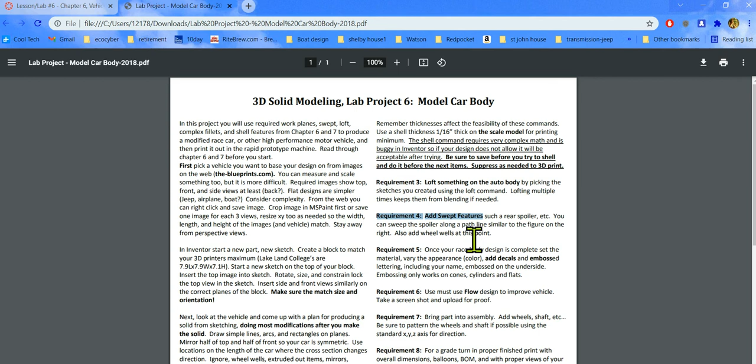You got to loft something. Well, most of you are lofting the body of the car, so you're covered there. But we do have to do a swept feature. So you can do a rear spoiler or an exhaust muffler type thing, or you can do a mirror. I'll probably do a mirror in the video today. Once that's all done, you can add decals and colors, which I did in the last video. You can drag them in your browser down below the mirror if it doesn't look good. So I'll show you that in the video too.

I do have an Inventor feature that used to offer flow design, which was a really cool item. It lets you do aerodynamics on items you just did, and showed you the drag coefficients on them. They quit supporting it though, so it doesn't really work very well anymore. If I can get it to work, I'll show you, but I know they quit supporting it a year or two ago, and I don't think I was able to get it to go last year. So you can ignore number 6. If you're really interested, you could probably download the old version of Inventor Educational and download the flow if you can find it. I do have a higher end version that's out there, but I haven't messed with that yet.

Then the last thing, main thing we're going to be doing today, besides doing the sweep, is we're going to add wheels. And you can add a shaft - the main thing is adding the wheels. You don't have to add the shaft unless you want to make it roll or something like that. So basically, then 3D print everything, or add a drawing and then 3D print it. That's all the items that are required. The wheels and stuff do need to be added in an assembly, of course. So, all right, let's go ahead and get started.

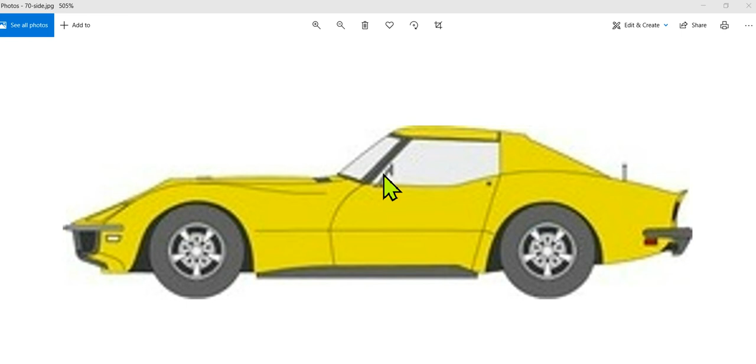So this mirror, it's definitely got a couple shapes in here, so it would be hard to do that with a pure sweep. Now, if you're doing a wing, maybe I'll put a wing on this thing to show you that sweep would work better with that. This mirror is more of a separate loft. I'll just do both real quick here - I don't know how well they'll work, but we'll give it a shot.

Okay, so let's look at the mirror. When you do the mirror, you need a plane to start with, okay?

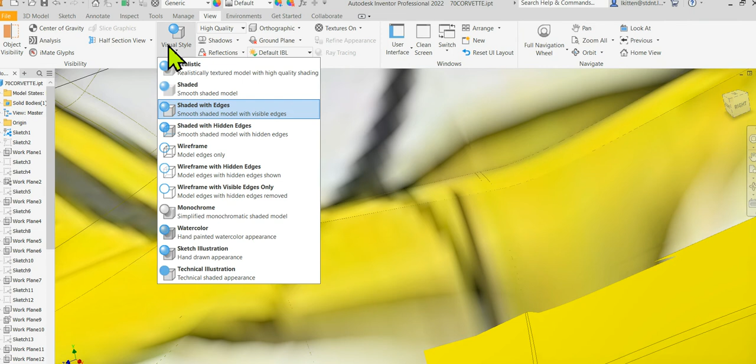I'm going to go into a hidden view real quick here, view, hidden, or visual style, wireframe, so I can see everything. I noticed before that this plane was round where the mirror is. You can go back and forth there if you want to, shade it with edges. I could probably do that too.

Okay, so I'm gonna make a plane right around here, and then on that plane I will put the mirror. You can see the mirror's getting messed up bad with this decal.

So back to the 3D model, I need a plane there to put my first sketch on. Now I need another plane to put another sketch on. I'll show you how to create a couple of them real quick.

One of the definitions of a plane, of course, is 3 points in space. So I'll pick 3 points on this one. I don't know what else would work, it'd be pretty tough to do some of these other ones. So I'm gonna pick 3 points.

And there's a nice flat on here. You could also go flat all the way across the car on edges, but I've got a flat there. So I'm gonna pick like, and it can start out inside the car.

It's not a big deal, it just needs to be. In fact, it might work better if it's inside the car. Then you want to have an airspace in there.

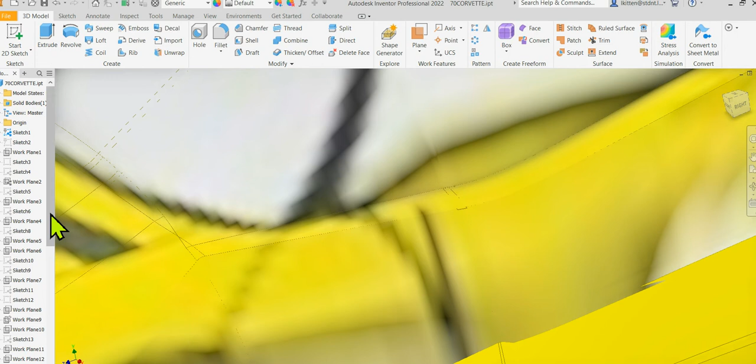So I'm going to go actually from these 3 points right here. Okay, so there's a small little plane I just created there. You can't see it unless you go down here because it's basically inside there just a little bit. It's shown real small, but remember it goes on indefinitely into space.

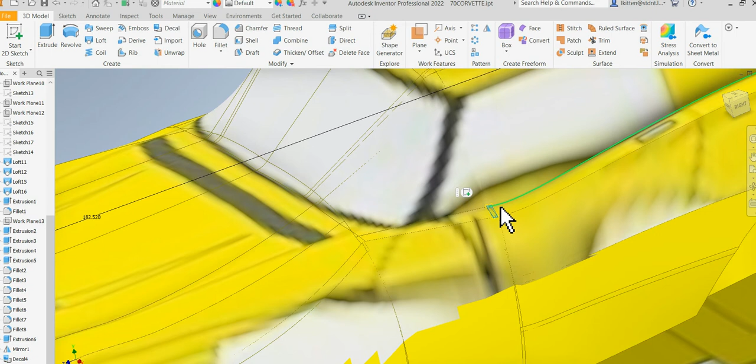So I'm going to put the sketch at the bottom of my mirror on that. Now I need a sketch basically perpendicular to that to create my cross section on.

Okay, so to make one of them, let's see if we can figure it out. So parallel, midpoint, through normal to curve, normal through axis, through point, tangent, tangent, tangent, go 3 points.

All right, so now I need to create a plane for my path. So I'm going to do angle to plane. I'll just do 90 degrees to plane around edge. So I'm going to pick that one.

And first thing it says, select line or plane. Well, there's no line or plane in here. So maybe I can make an axis first.

Axis. There's that plane, so I'm making that axis through those 2 points. I'm dropping down the axis, and I'm going to put it through 2 points.

And there's no points on there, so then I got to create a point. So this is how you kind of build it up. So there's that plane, I'll make that thing, it already is visible.

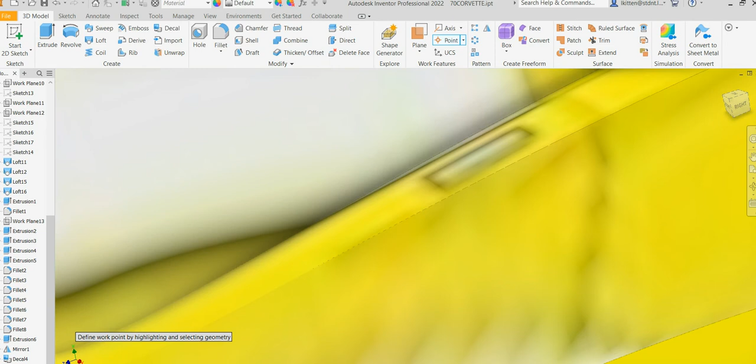Go back to hidden so I can actually see it decent. View, visual style, it's a little tricky here. Wireframe. There's that plane I created right here.

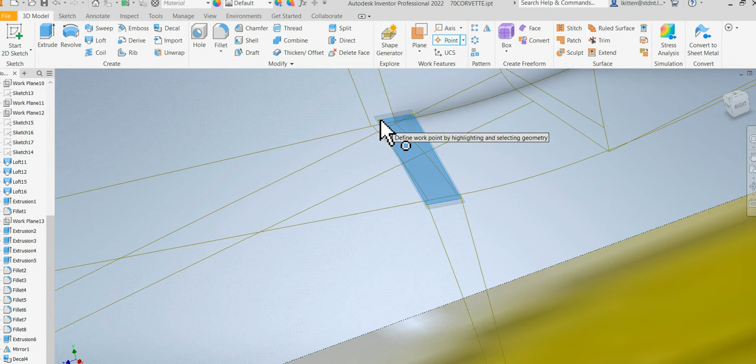Okay, so I'm going to put some points on there. 3D sketch. Points, and right on the corners of it, I'm going to try to create a point. It lets me.

Not one there. Okay, there. I wasn't actually on the point, I was on that plane. So I'm going to the point of where those.

I'm creating points on the intersections of all those edges. Okay, now this is a plane, so I couldn't of course put a point on there.

Now I've got points basically on. I keep hitting it, I wish it would stick, but it doesn't. There we go, I got 4 points on there.

Now I can create an axis through there hopefully. So axis through 2 points. Okay, now I've got an axis on there and a plane, so I can hopefully use those to generate another perpendicular plane. You'd think they'd have one that'd be perpendicular a lot easier, but I don't see it.

Mid plane between, parallel, offset, these are all offsets. Angle around edge. Okay, select a line. We've got that line. Select plane.

Not selecting any of that stuff. This isn't working out very well.

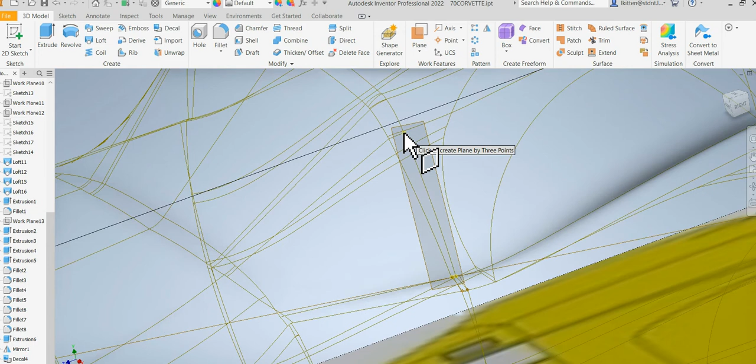Alright, I'm not having much luck making that plane, so I'm going to do an offset from plane after I create another one. Back to 3 points, because that always works. I'm just going to pick a point right here, and then I'll pick one up here.

Okay, I'll do offset that one slightly. Now I'll do a plane offset from that one, maybe about 3 inches. It's going towards me, it looks like. Okay, it looks like that's going to cross there. I'm going to spin it and make sure. Definitely is not crossing that. So maybe more like 1. Now it looks like it crosses through that other plane, which is important for me to draw on.

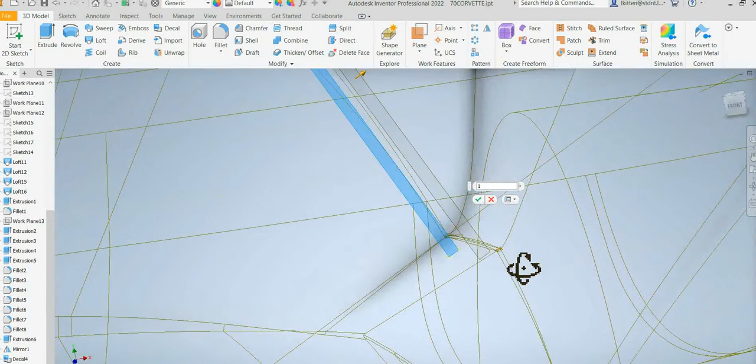So now I've got a path and a plane to start with. To do a loft, this is just going to be the stem - I'm sorry, the stem of the mirror. I'm going to draw the stem on here, new sketch. It's kind of hard to see, but it's over here in this area, I think. Sure I'm on the right side, there it is. Okay, because you got to kind of keep where you're at.

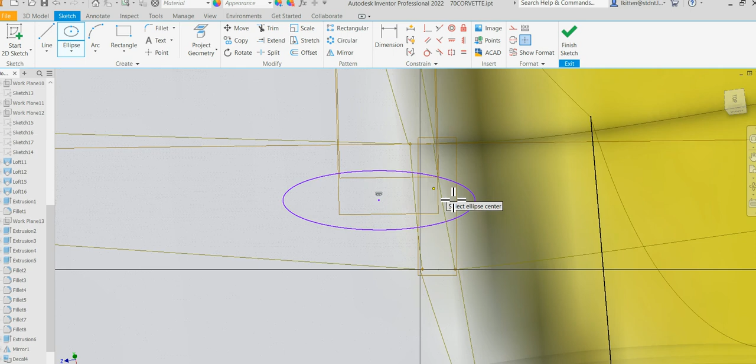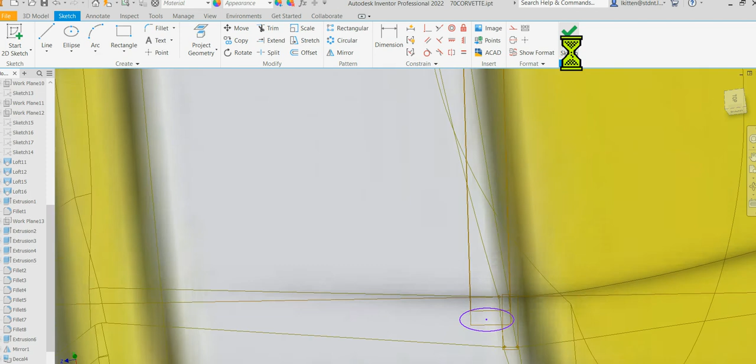So I finish that sketch. Make sure it looks like it's about in the right place. It's hard to tell when you're over the top of it because it puts you in another area. Then on that other plane I made, I'm going to give it a path. So new sketch onto that, and this will be a path on this one, and it needs to basically go through here.

So I'm going to project that point, project geometry, and project this point, and that'll be my starting point if it'll let me. There it is. Okay, and now I need to draw basically a path for it. Arcs usually work pretty good, so I'm going to start out with that. I'm drawing on that other plane and going to give it a path for my mirror stem, basically. So this is the end.

On the side view so I can see what I'm doing a little bit better, even though I'm drawing on that other plane. I'm drawing on this plane right here, but it's on the side view of it. So, something like that. Okay. Now I'd probably attach a small base or attach the mirror to this when it's done. But this is basically a

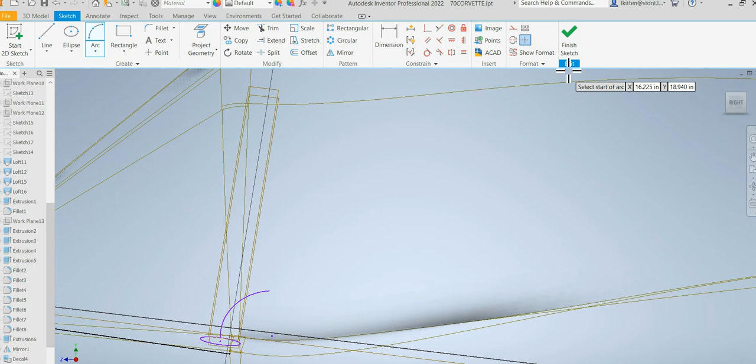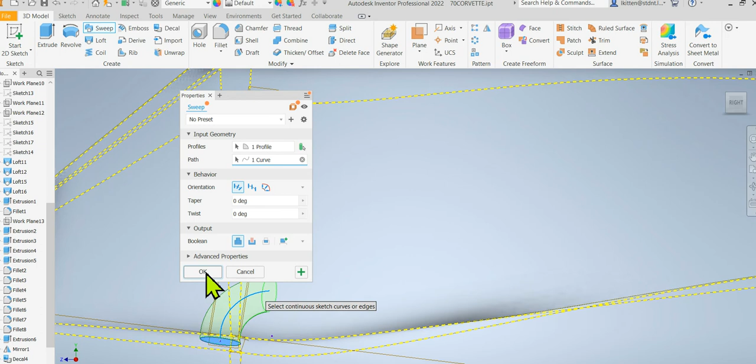sweep, a profile along a path. Okay, so now I'm going to try to sweep it, which is very similar to the lofting, except it's one along a path. So there's my profile selected, and it says select a curve to follow, so I'm picking that because it found the one. Now that's too big, I'd probably go in there and change that sketch later, but I hit OK.

Okay, so that is supposed to be just the stem of the mirror. Now, when I go back in the edges, hopefully you can see it. It's definitely too big, but hopefully it's roughly the right shape. View, visual style, shade with edges. So you kind of get the idea. All right, now I'm going to probably go in there and shrink that down. It's definitely too thick, but I was just trying to draw that stem, okay?

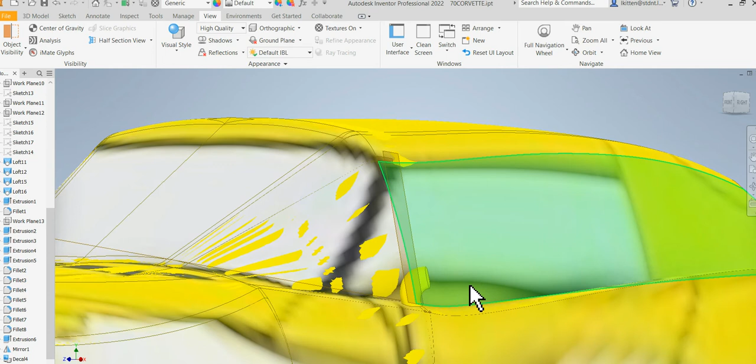Now I'd place a mirror on the end of this face, any shape I want, okay? Because that's definitely a plane right there. Okay, and I could put a mounting surface on the bottom of this plane if I wanted it to be part of that, and then mirror to the other side if you have a second mirror. But that's one of the requirements, is try to put in a sweep, which is a little bit tough. Okay, wheels and tires. I'm going to save this thing.

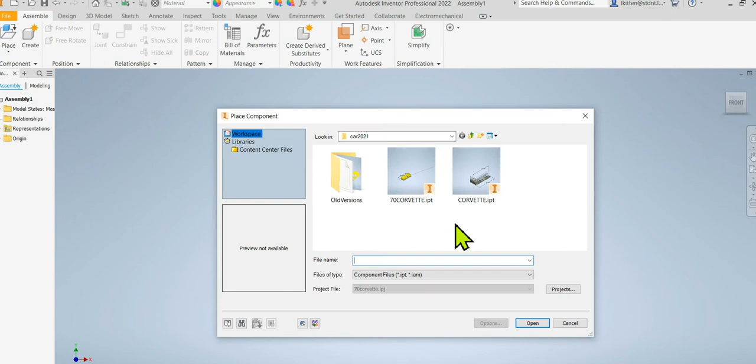Wheels and tires are pretty easy. I'm going to go file, new assembly. So we've done a couple wheels and tires with the skateboard before. This one's actually much easier. Place, bring in the Corvette or your car, right click, place it grounded at origin. Okay.

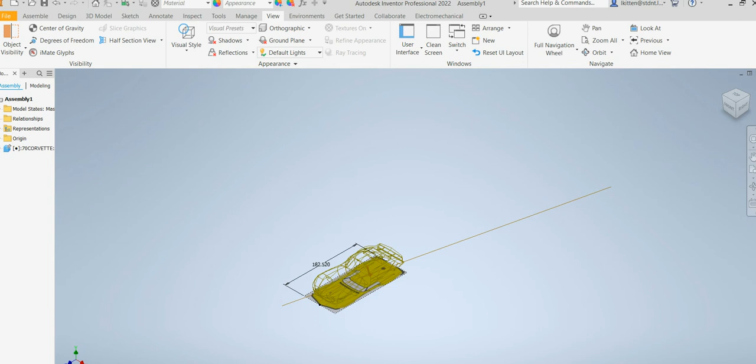Just one of them. Go back so you can see everything. Go to the view, visual style, and turn it to a wireframe. Okay. Now over here, I can't see everything, so I'm going to do the same thing, and I've got a lot of things hidden on this thing. Well, I need to see that middle view to be able to draw my tires and wheels.

So I go back up here to where I created it, which was probably sketch 2. Okay, there's sketch 2. I'm going to right click and make that visible. And both the sketch and the image have to be visible before you can see it. Now I can see the wheel.

I already have the depth cut into the car for how far it goes in there, so I'm just going to use that for how big my wheels are. You could also get the side view so you can see how wide they are, but I don't think I need that. Okay, so now it's showing up here.

All right, now I'm going to create it. Okay, so you need a plane if you don't have one already on the outside of it. You probably have one, because if you created the wheels, you probably have one. So I'm going to go make that visible if I can find it. There's so many planes in here, sometimes it's hard to do. But there's a plane, when I did my cutouts for my wheels, which was an extrusion.

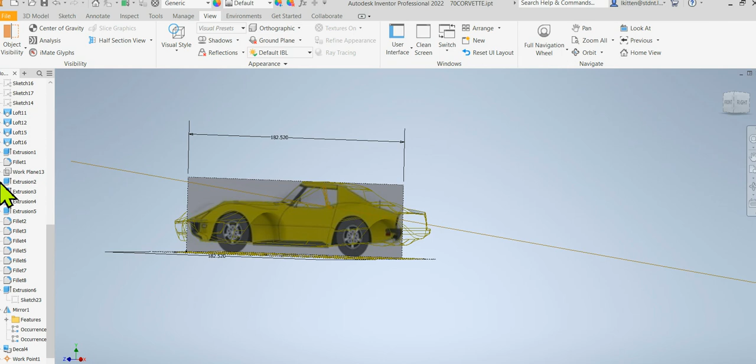There's my wheels right there, so it's probably on that first sketch. There's the work plane, so I'm gonna make that visible. That's the one I used to cut out my wheels. It was around the extrusion that I did to cut out, so you can see where it's at. So I'm gonna use that same one to basically create my wheels. Now, granted, they're gonna stick out a little farther, but that's fine.

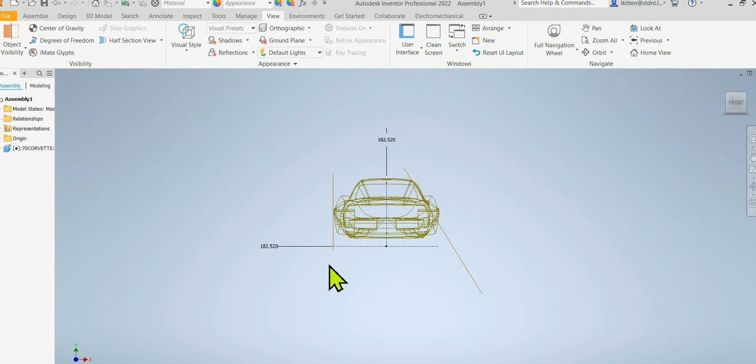Okay, so now I'm gonna save this so it shows up in my assembly. Okay, there it is in my assembly. So I had to activate a few things back in my assembly that I hid earlier, but that's kind of typical for what you're going to have to do too. All right, so now I'm ready to basically make those wheels.

So on this plane here, how do I create that plane? Let's see here, assembly.

So I'm right-clicking on that one and picking new sketch and see if it'll let me make one on it, because it didn't want to pick it when I had it earlier. So now I'm creating, I did it over here in the browser. I probably could have picked new sketch and then it would let me pick it. Let's just see if it does.

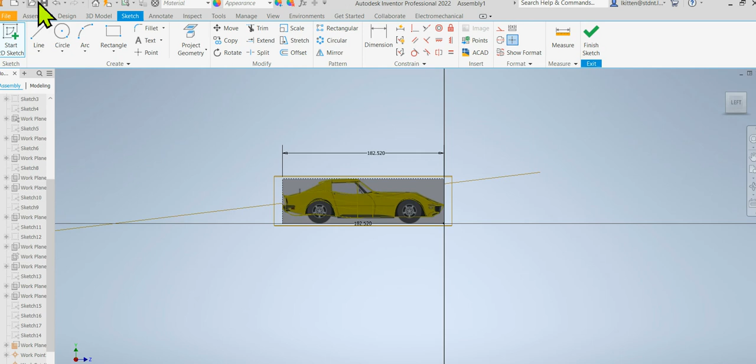So I went back to where I was and I'm picking new sketch. Well, I got to pick create first of all. Getting ahead of myself here.

Okay, so we're creating the wheel and tire next. I guess I'll do the tire first, and then the wheel after that. So I go to create and tire, all caps.

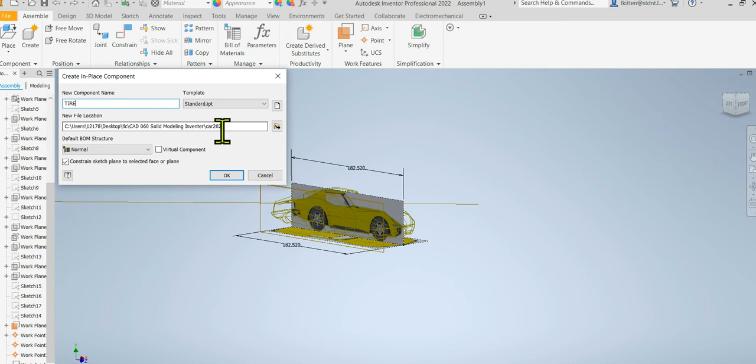If you create a project, it should be going to the right place, like mine is. If it didn't, make sure it's going to the right place. I hit OK. Now, once I know a plane to put it on, what's it going to be on, the same plane I've just been using. Well, I kind of got ahead of myself on that, sorry about that. So now I'm basically creating a tire on that plane.

Okay, more of a tire and a rim. Now you can make these into one part. I'm not going to tell you, you can't, because you can color them. If you want to make them in two, that's fine. Either way is good, because you're probably going to 3D print them together. So I'm going to assume most of you are going to make them as one piece. So I'm going to do the tire and wheel as one assembly.

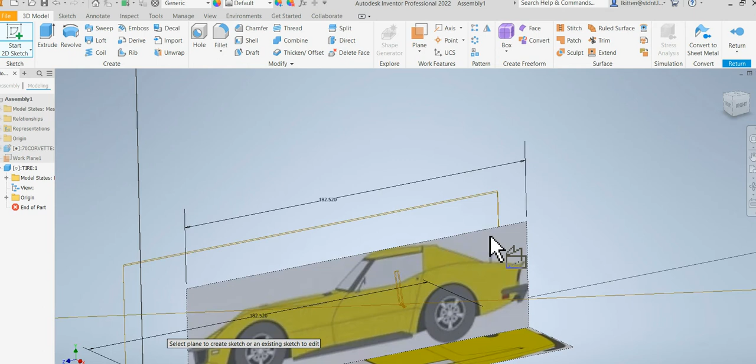All right, so now I'm in this. I'm not in that sketch yet, because I just basically created my part. Okay, 2D sketch, 2D sketch, back to that same plane. Okay, seems like I'm on the wrong side of it, and I am, so I don't like that. All right, I'm spinning it around so I can see it better.

Now you basically try to draw that shape. It's close. We're not going to spend as much time on this wheel as we did the other one, so we'll kind of keep it simple. Just go to circle, okay, it should be roughly the right size when you get done.

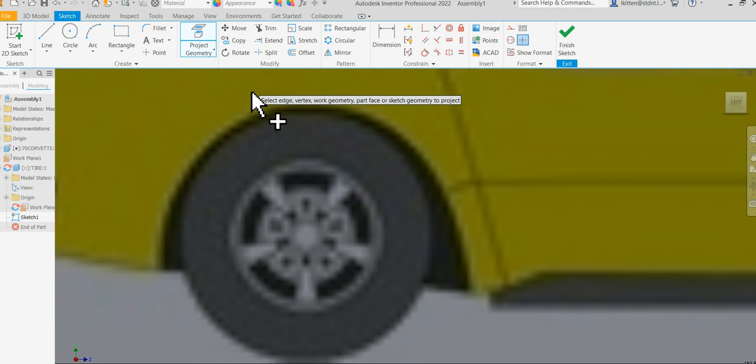So I'm going to find the center of this. There's a couple ways to find the center of this. You can just use your sketch if you want, as long as you followed it closely. Okay, or you can find the center. You can project one of those arcs that you had earlier, like project geometry, and it should be an arc here that you used to make this wheel.

There's mine. It looks like I made it a little bit small. I did it on purpose because I didn't like the way my fairings were coming out. So I better, unless I want my tire going inside this thing, which is not going to fit the way I'm going to do it, I'm going to project that.

And that'll give me a center point to use. Okay, now I should have a center of that now. So I projected my fender wall there. Okay, now I'm going to go up to circle, hover over this, and I would think I could find the center. Well, is there a 3-point circle here? Tangent.

It's not letting me do that either. I should be able to draw a new arc on it, so I can finally get a center point here. There, so I had to draw an arc over the top of the projected one to get the center point, which is very annoying, but that's what it made me do.

All right, now I go to circle and create my new wheel. My new wheel doesn't match that one a lot because I didn't like the way my fender flares worked out, so you can adjust yours as needed to match it. Now I don't want to tire that big either, so I'm kind of playing a game here, but it's all right. That's what you got to do sometimes.

Make it more realistic. Make sure it's centered on there. Okay, that's pretty close to what I want, right about there. I don't want it gigantic, it just won't look realistic. I didn't put it anywhere, so now I can grab the center point and move it around a little bit. Okay, that looks pretty close. Okay, so I've got that.

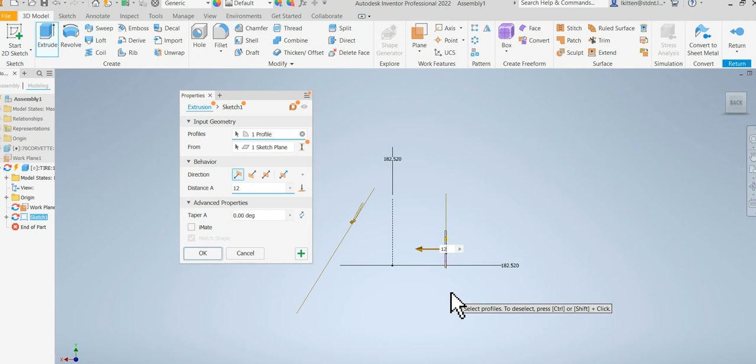A 12-inch wide wheel is pretty big, so I'm doing 12. Okay. Now the car is hidden here. I can probably make it show up. All right, clicking on visibility on.

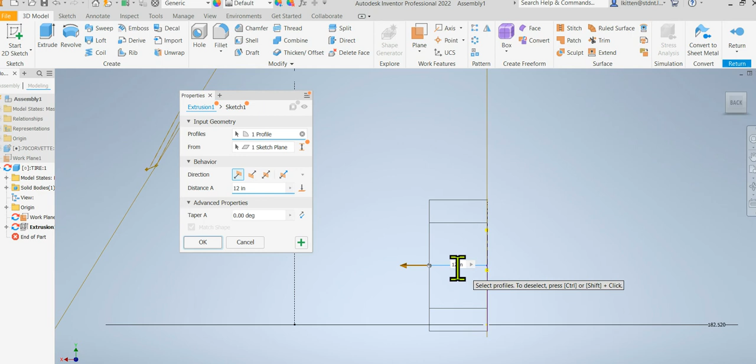I'm just going to hover over it, and it shows up. So I should have made that bigger. So double click on it, and then go to make it a little bit bigger, maybe 14. That's close enough. Work. Yep.

Compare it to my car. Yeah, that looks pretty good. I like that. All right.

Now basically you want to make another plane for your rim a little farther past, so I go plane, offset from plane. Maybe my tire sticks out an inch or two, so I'm going to put 2 inches so it's more visible. I'm going to make my rim match on that.

Okay, so to make your rim, you can copy these on all 4 places if you want, or mirror them across the middle of the car. Copy them would probably be easier, or drop another one in and just put it where it needs to be.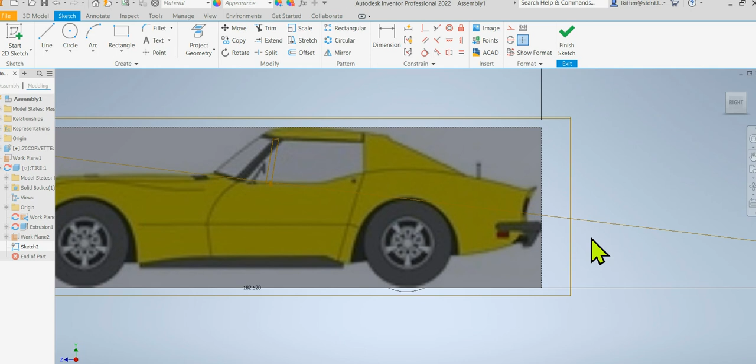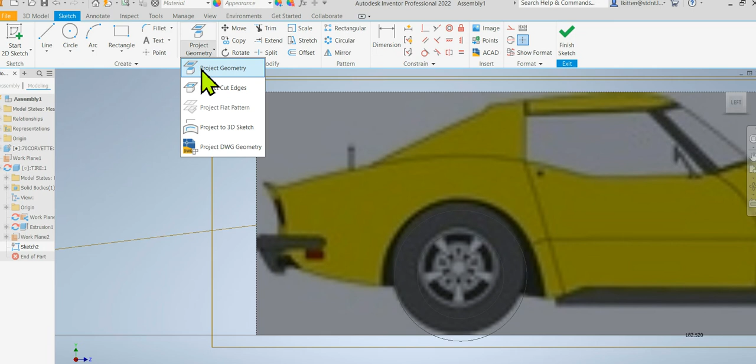Sure I'm on that right plane, I guess I am. Yep. Okay, so the rim would be something very similar, so I'm going to draw, probably project that geometry, project geometry, to get the inside. That'll be my outside of my rim.

Do an offset to get the size of the rim, so that looks like it's about an inch or two, so I don't know, say right about there. And then I'm going to basically draw lines, maybe another circle in there actually for the inside. I might do the inside later. I'm going to try to create this cutaway, and then I'll add a spoke probably and rotate that around.

Okay, so I'm going to do 2 more circles, so that's going to be a cutaway. I need a cutaway from there. So the center of this is right here. Okay, so I'm going to cut this part of it out. Okay.

And I'm going to add this part in all the way through, and then I'll put a spoke all the way around when I'm done. So finish sketch.

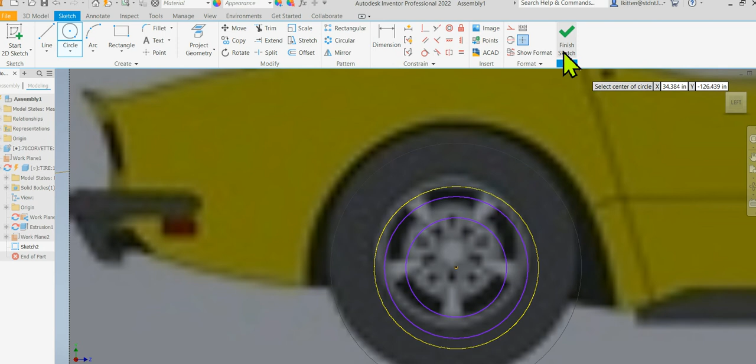This thing is 2 inches less, so I'm going to extrude that through. So extrude, and that was the outside, so that's my rim. It was 14 before, but it's 2 inches less now since it's going into the wheel, so I'll put 12. And that one's done.

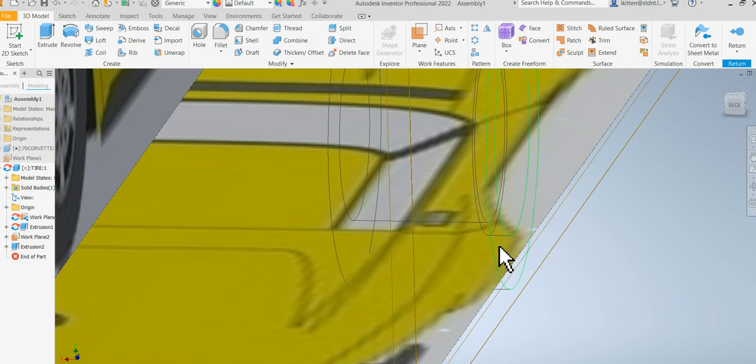I'm on a hidden line, so it's hard to see here, but that way I can see my picture. I'm about done with this thing. Now the last one I need to cut this out, so I'm going to have to share that sketch.

So I pick over here, right click over that sketch, share it. And I'm going to extrude, cut that into it, extrude that, cut through all, so it's going the right direction, which it looks like it is, and hit OK, so that's cut out of it. It didn't cut through anything.

Oh, because there's nothing in there to cut into there. That's right, I should have just... yeah, that's still empty on there.

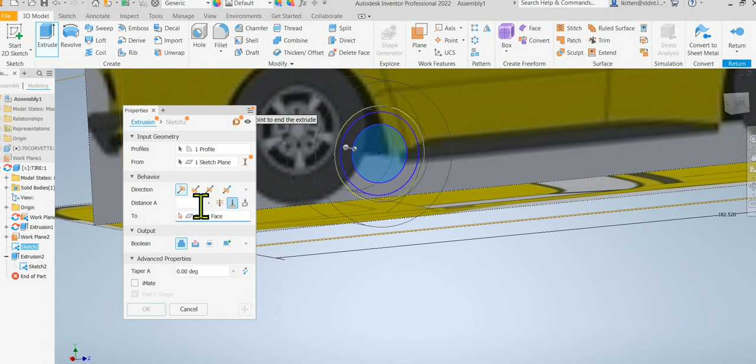Okay, so this is the inside of it. This is this part here. So I'm going to go ahead and put that all the way through, just solid it all the way through. There we go. Other direction, 12 inches. Distance, 12 inches. Okay. All right, so now I've got solid in there.

If I get out of the view and back into shaded, you should be able to see it. All right, so there's the start of my wheel. Now I'm going to basically add a spoke and rotate it around there. Maybe put some fillets on it.

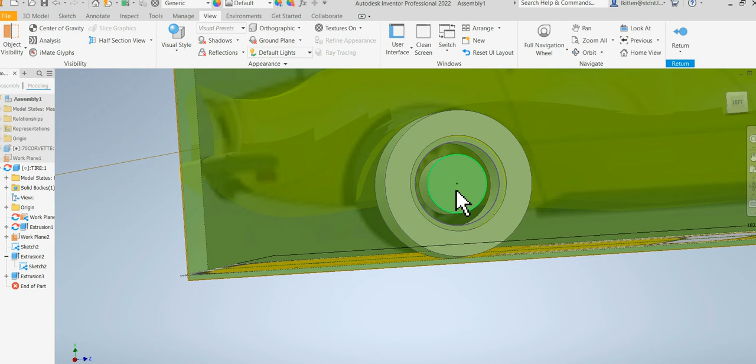So that's pretty simple. I'll do one more and then you guys can do this on your own. So new sketch. Simple spoke.

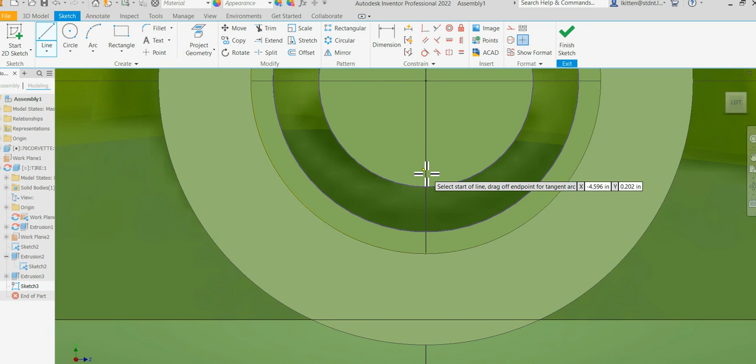It's trying to go straight here, so I'm just going to draw a line like... I don't really like where that's at. So maybe from here to here, and I'll trim it in a minute. From here to across the center, tie a line there, line.

Construction. I've got a center line, trim that up, trim. I have to project those other lines, project geometry. So I have to project that one and project that one. Trim. Get rid of that, get rid of that, mirror it over.

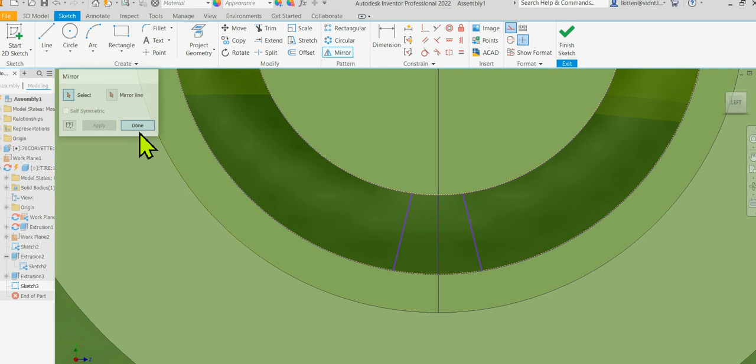Did not mirror, why not? Try again here, mirror my line, pick my mirror line, apply, done. Okay, I should have enough to extrude that in, finish sketch.

Extrude that 3 inches deep maybe, so 3D model, extrude, and it's not finding it.

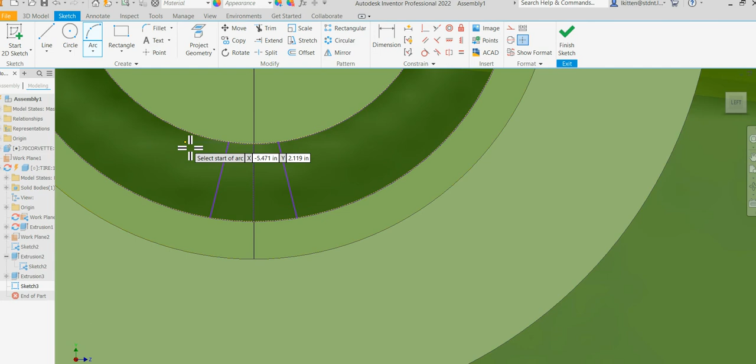So extrude. So it's picking that whole thing every time because I shared that darn sketch. So then the way to get around that is you hover over it. If you can't, it's letting me select it finally there, but if not, if you hover over long enough, like I'm going to here, then you get an option, okay? And you get a pick, okay?

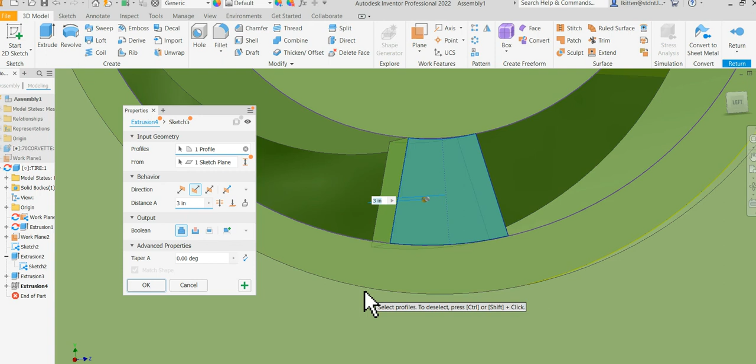Now I want to go in the other direction. I just want it 3 inches deep, and I can put radiuses on the outside to make it look like a spoke, okay? And it looks like it went to a darn cut. So I switch it over to solid. Make sure it's going the right direction. Hit okay. So I put a fillet on this and a fillet on that, and then I would rotate it around here.

So fillet, maybe a 1-inch fillet. Not liking that at all for some reason. Seems like it'd be simple, did one of them, but it won't do the other. It's too big.

Fillet, .5. They were hitting each other, I think, was the problem. Still not liking it. All right.

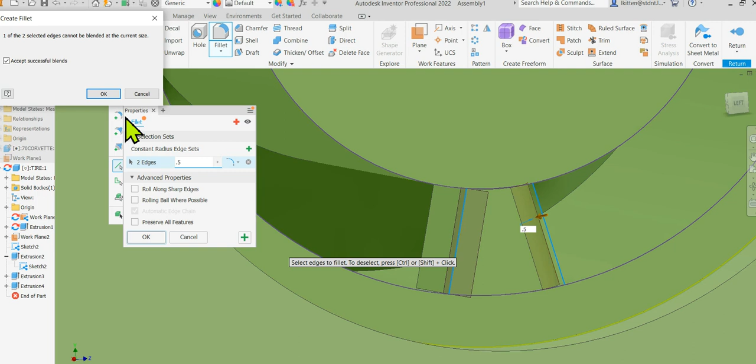I'm going to mess with that a little bit here and see if I can get it to work and then rotate it around. So fillet, 1/2 inch. Sometimes you go all the way around, it'll work a lot better. It's not.

So I could play with that a while and try to get it to work, but I just wanted to show you guys how to rotate it around, so I'm going to do that real quick here. So rotating it around is pretty easy. All of you should know how to do that, right? It is basically array. Pick the item.

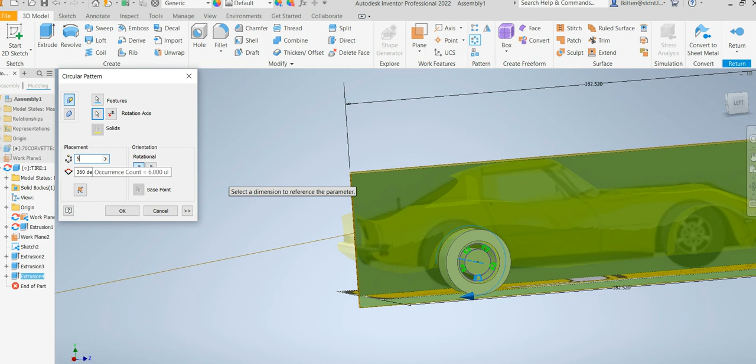Pick the rotational axis, which is basically anything that's round. Tell it how many you want. I don't know how many were in the original picture. I can look. It's like 5. 5. And okay. So now I've got my wheel and tire, all right?

I could put a shaft hole in there so I could actually put a shaft on this thing and it'll roll. Probably be a good idea to put like a 3 or 4 inch shaft hole in there. And then you could basically put a drill bit or something in there if you want to get this thing to actually move. And then I put a fillet on the outside of this so it looks more like a tire. Change the colors to black with the colors like we did earlier. Okay, and change the rim to chrome. And then I'll show you the finished version of that eventually.

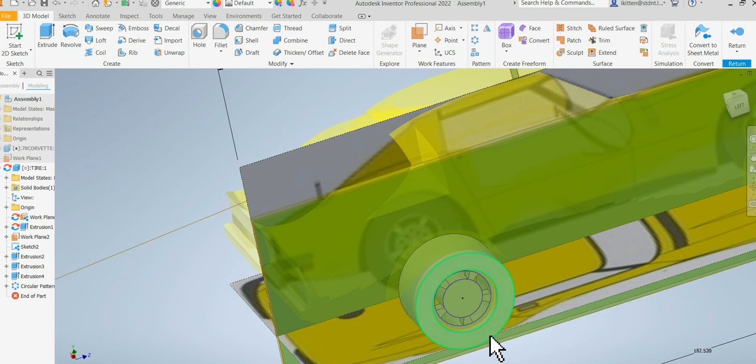So I offset that spoke 1/2 inch so that would let me fillet it all the way around it. I suppress the spoke and then fillet it all the wheel tires.

Now I'm going to move that fillet to above the action over here, and then I'm going to unsuppress it. Hopefully it'll work. There we go. So it's starting to look a little bit better.

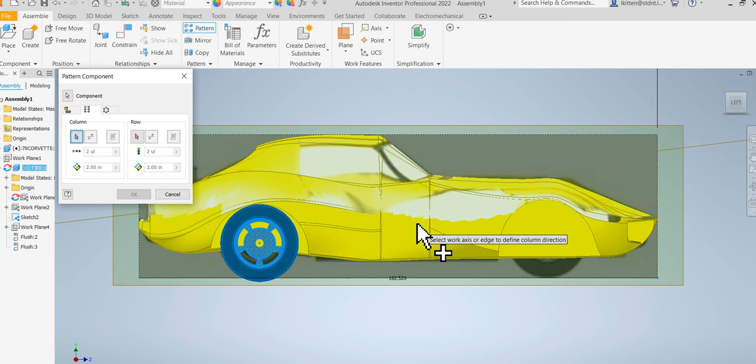Just looking for a direction to go here. So I can pick an axis for that. Would probably be my best bet. Origin. Maybe the Z-axis. Y-axis looks like it's going the right direction. So the distance in here,

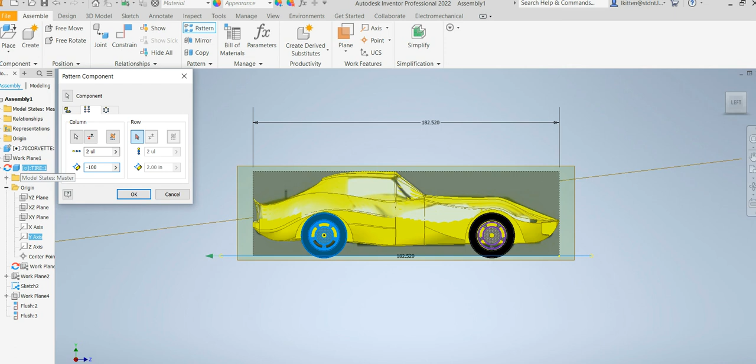and quantity is 2, and distance be negative 100 to start out with. Pretty good guess, it's about the right place actually. So I put 100 inches over, hit OK.

Then I mirror it across the middle plane. So I find my middle plane, which is probably one of my original planes. That one. So I go mirror. I grab those 2 wheels and turn them to yellow so it doesn't create a new one. Mirror plane.

And I've got to grab the original plane here. It's the middle of that one. Probably that one. Definitely not that one. Back to mirror plane. That's the one I want right there.

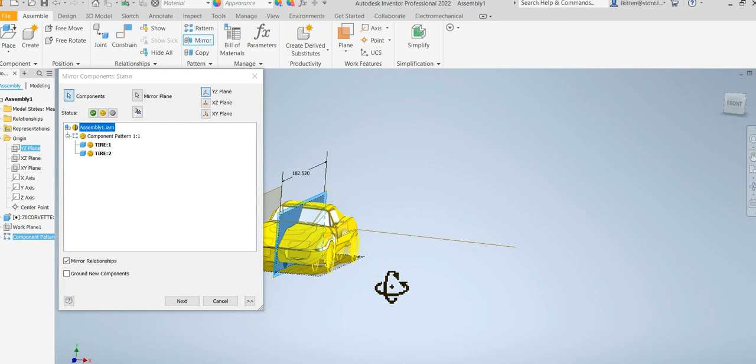Okay, and see what looks right. It does. Next, no new parts. Okay, so it's starting to look like it now.

You got your 4 parts set up, so you bring that into a drawing and do a standard drawing with bill of material, overall sizes only, and balloons. And then turn that in, and that will be finished. Okay, and then 3D print it if a 3D printer is available.

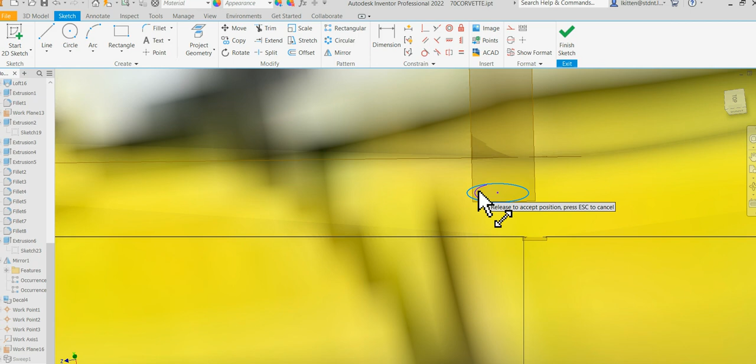I'll put a sketch on the front of this. It's not real straight, but maybe it'll work.

Circular mirror again. Maybe an oval one. I'll make that bigger later. Get outside the vehicle.

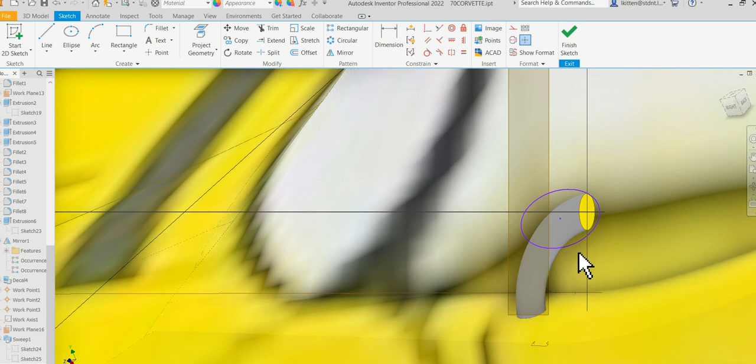Sketch. Plane's definitely not going to work where it's at.

So what I can do with that is probably delete that sketch. And find the middle plane. Do an offset from that one. Drag it till it's in the right spot.

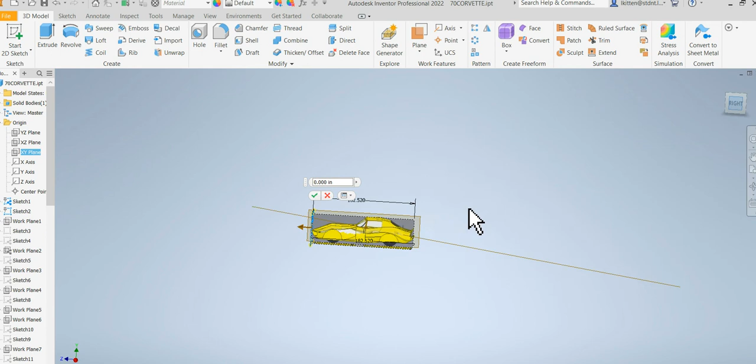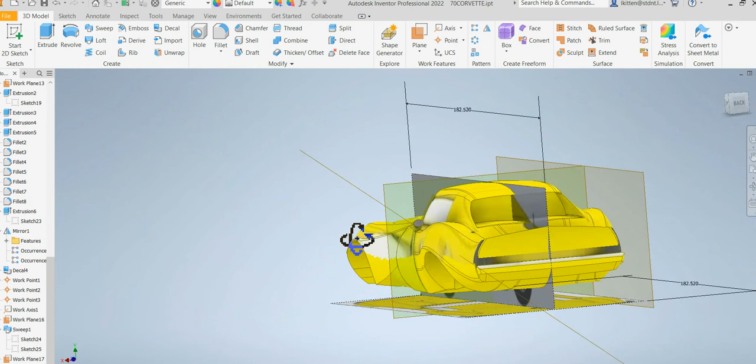All right, so when you're done with it and you're happy with it, I think I've got everything from the list done. I'm ready to bring it into the drawing.

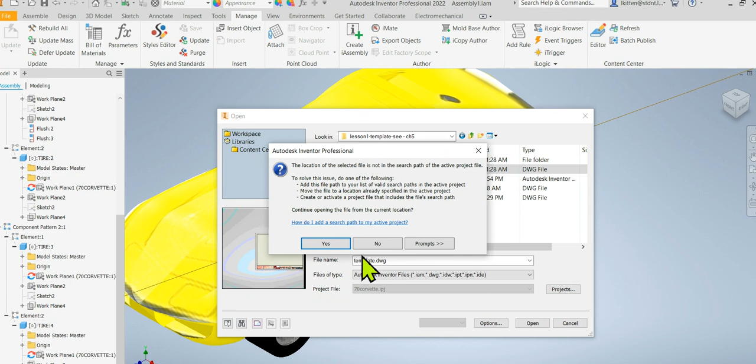Okay, so basically file, open up your template. Change size over on the sheet to B or C size, whichever you prefer. C will print out better if you want to print one.

I did B there, and then go to base and bring in your assembly, which mine found it because it was open, but make sure it's the full assembly. Make sure it's the view you want.

I probably want the side view to start out with. And I don't know, pick the best side. Like that. It's doing shaded with edges.

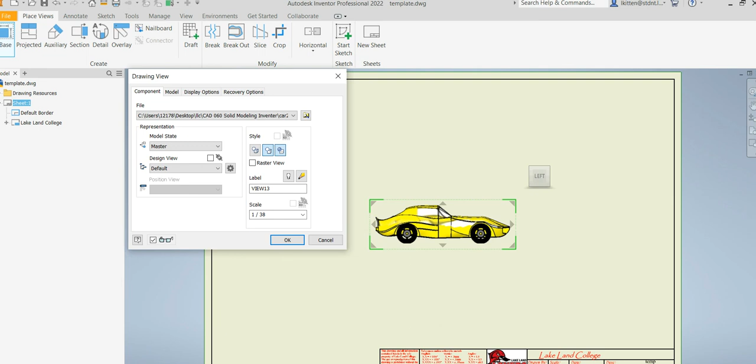I don't know if I can turn edges off. Change scale to something more realistic.

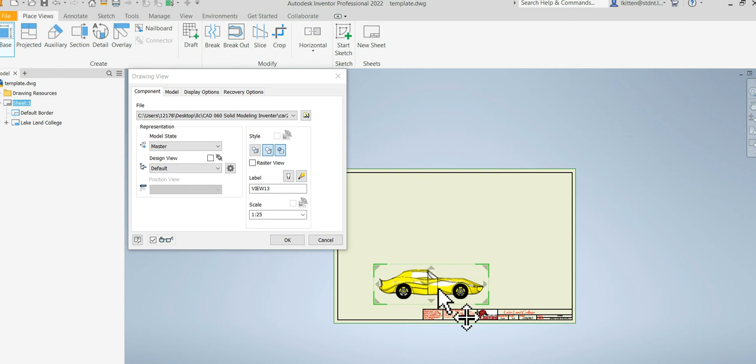The 25 works good. Let's start out, I don't really like that either. That, I guess, 3 views. 4 views, I mean. We move them around as needed.

I guess bill of material will be next.

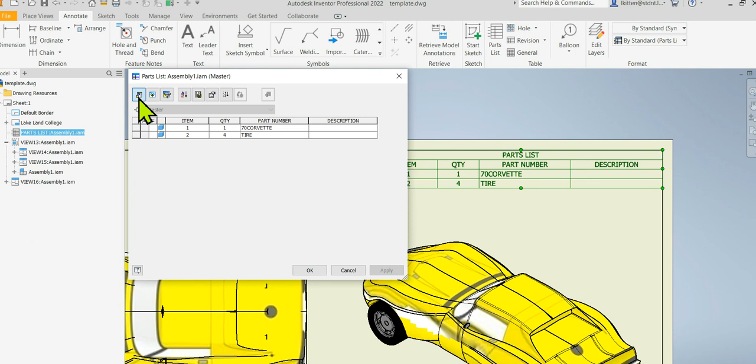If it looks right, go and double click on it, get rid of the description if you want to. Column chooser, description, remove, okay.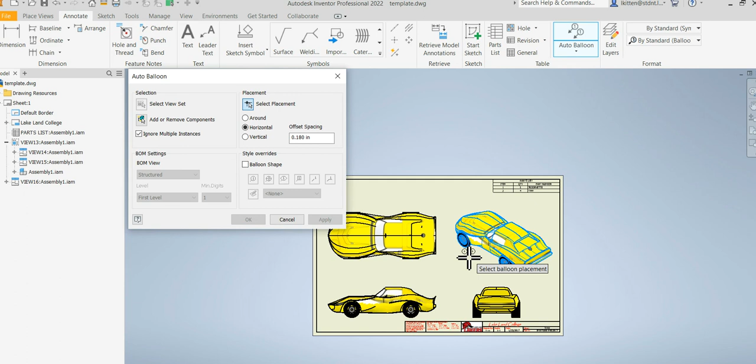And then add your balloons. Auto balloons are the easiest. Do it on there. Select placement. Gotta pick up components first of all. Placement down here. Looks good. Okay.

Make sure you label the views. Front, top, side. I want to color these windows too so they look a little bit better from the back. Front, top, side, 3D view, and put the overall dimensions on it. So overall dimensions just 3, length, width, height, right?

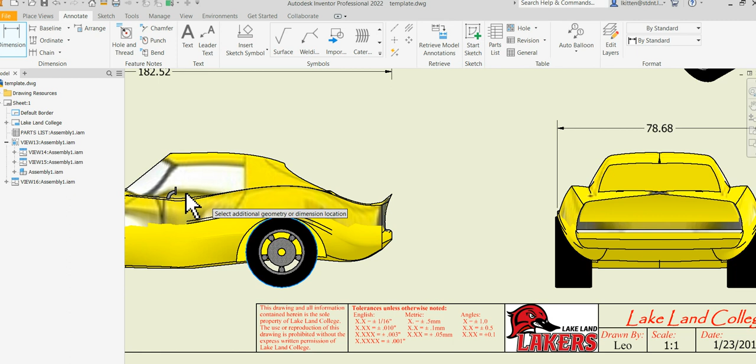And make sure you label the views. I think that's all that's left on this.

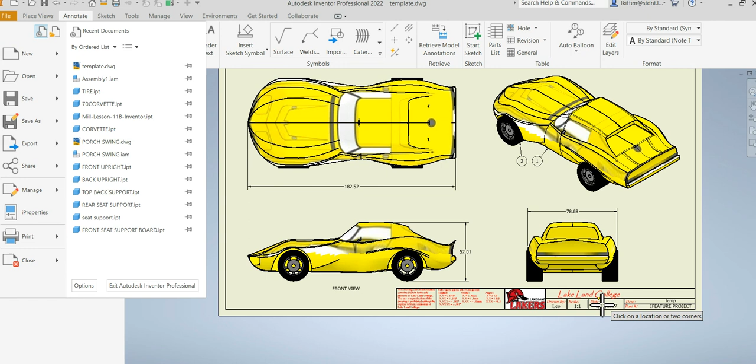Make sure you update your drawing, save your drawing and then update it, save it to something else, right? You just save, and then after you get done saving it, make sure you update the iProperties so the title block is correct.